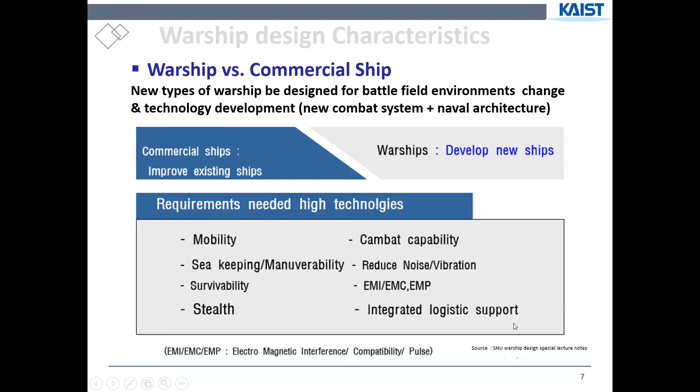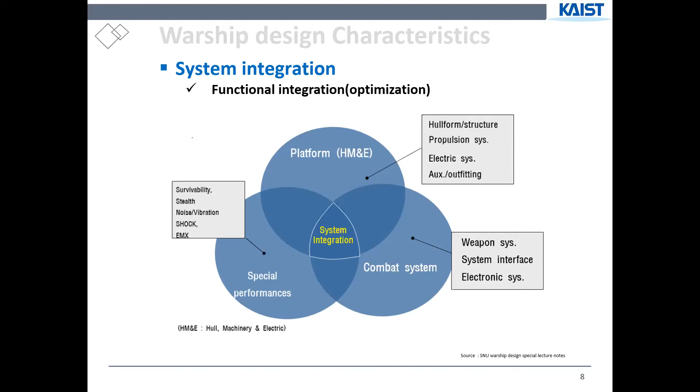And another important thing is the warship system integration. First, functional integration. As you know, the warship function has three categories: platform HME (hull, machinery, electric), special performance function, and combat systems. Special performance is the survivability, stealth, noise and vibration, shock, and EMX. And combat system is the weapon system and interface electronic systems. All three functions need to be optimally integrated. Then the warship can get the enhanced performance.

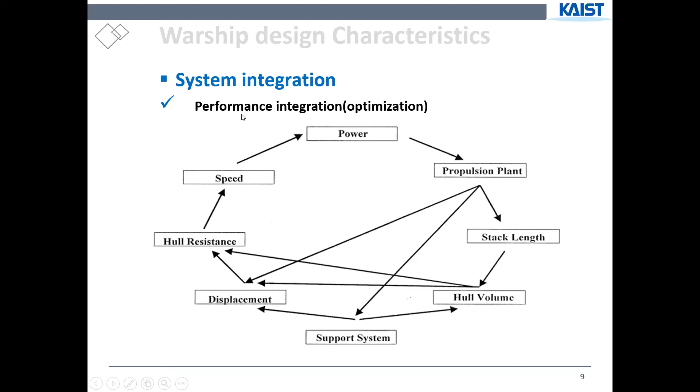And then there's performance integration. Power, speed, resistance, displacement, and hull form, propulsion plant, all components influence each other. And so we have to do a performance-optimized design.

And space and area integration. In the warship, the space is very limited, but many functions, requirements and needs exist. So limited area and limited spaces should be allocated optimally according to function. For example, the topside arrangement: the many radars, torpedoes, weapons and missiles, sensors, and guns should be optimally space integrated.

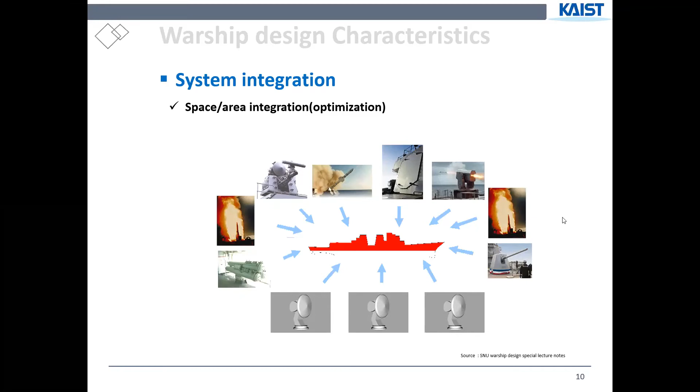And next is the information data integration. In a destroyer, there are about 100 to 200 small subdivision rooms in the ship. So all the information in the ship should be shared simultaneously. So all the data and information are shared, interfaced, and ultimately integrated. So an open architecture strategy for all the systems, a shipboard enterprise network and standard software are needed to use commercial off-the-shelf hardware.

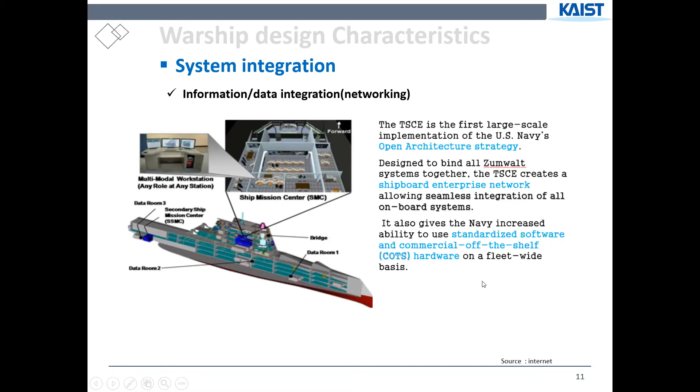Next characteristic is the combat system design. The combat system operation concept is, as we discussed before, anti-surface warfare and anti-air warfare in green, and underwater anti-submarine warfare in blue. So in our ship, there is airplane engagement and air missile engagement, and also surface missile engagement and gunfighting, and also communication with the command bunker by using tactical data links.

The underwater combat system engages submarines using the hull-mounted sonar, torpedoes, and the towed array sonar system, and attacks with the anti-submarine rocket. And to camouflage our signals, we can use the noise maker.

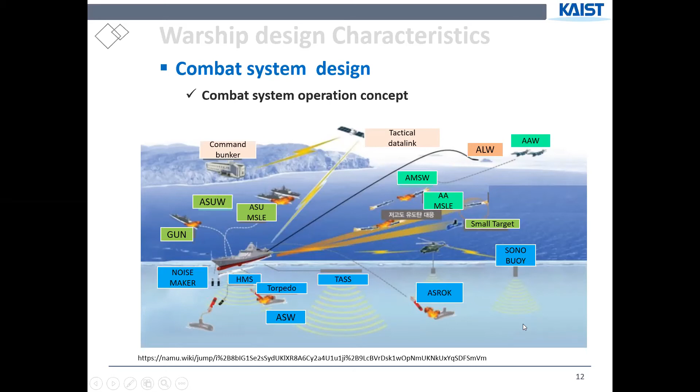Combat system configuration. The combat system is made of the navigation system, the gyro, GPS, EM log and indicators; the weapon system, guns, missiles, torpedoes, TACM, and decoys; the sensors, navigation radar, search radar, infrared search and tracking, surface search radar, electro-optical sensors; and tactical communication systems, Link 11, 16, and satellite communication.

All four systems should be optimally compromised and integrated as needed. And to control that, the combat management system controls all the signals and solutions in the CIC.

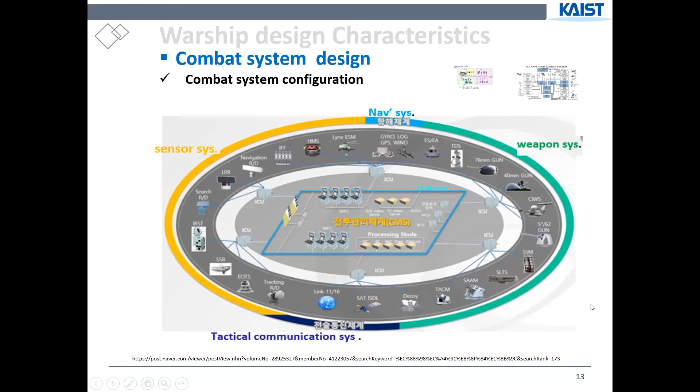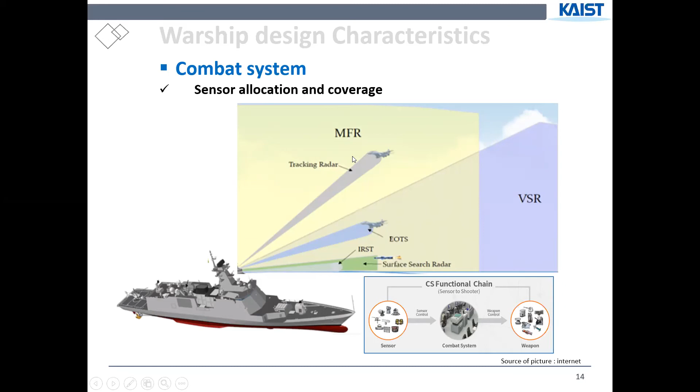We may have lost connection to Professor Na. Oh, okay. He's out. Maybe he will reconnect.

Here is Professor Park Jin-soo. He will be our next guest speaker, probably in May. He has been working for Hyundai Shipbuilding Company for about 30 years or so. And your mic is off, Professor. Yeah, my career is 35 years in the shipbuilding industry in Korea. Only Hyundai, or do you have another company? Only Hyundai Heavy Industries, the number one shipbuilding company. So maybe next month I'd like to talk about its strengths in this class.

Professor Na is lost. I should call him. Students, do you have any questions for Professor Park? You can ask about industry trends or something. I think most of the students are not familiar with the shipbuilding industry. So Adibu is from Bangladesh, and Bereket from Ethiopia. Oh, Ethiopia. Is it right? Yeah. And Ethiopia also has an ocean side? No, it's a landlocked country.